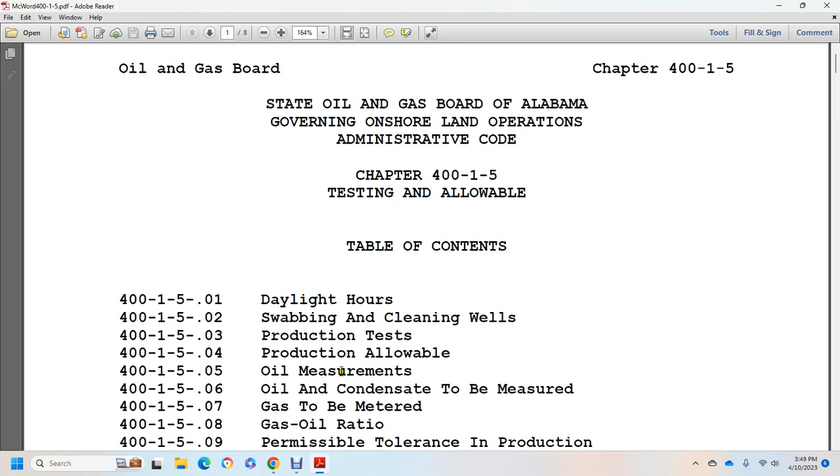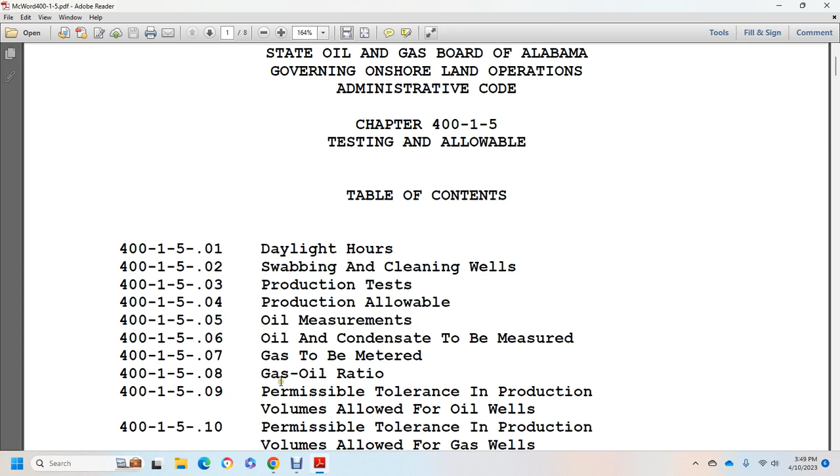Testing and Allowable, Table of Contents: 400-1-5-.01 Daylight Hours; .02 Swabbing and Cleaning Wells; .03 Production Test; .04 Production Allowable for Oil; .05 Oil Measurement; .06 Oil and Condensate Measurement; .07 Gas to be Metered; .08 Gas-Oil Ratio; .09 Permissible Tolerance in Production Volumes Allowed for Oil Wells; .10 Permissible Tolerance in Production Volumes Allowed for Gas Wells; Daylight Hours.

All open hole drill stem tests shall be completed within daylight hours; before sunset and shall not be considered as a production test. Copies of the drill stem test results shall be submitted to the board.

Rule 400-1-4-.03(2). For purposes of this rule: the word 'completed' shall mean with the closing of the drill stem test tool valve. No well shall be swabbed into production except during daylight hours and before sunset.

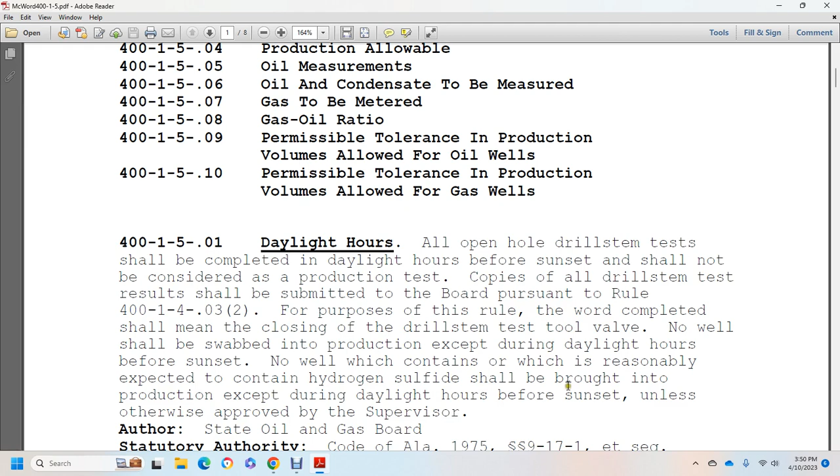No well which contains, or is reasonably expected to contain, hydrogen sulfide shall be brought into production except during daylight hours before sunset, unless otherwise approved by a supervisor.

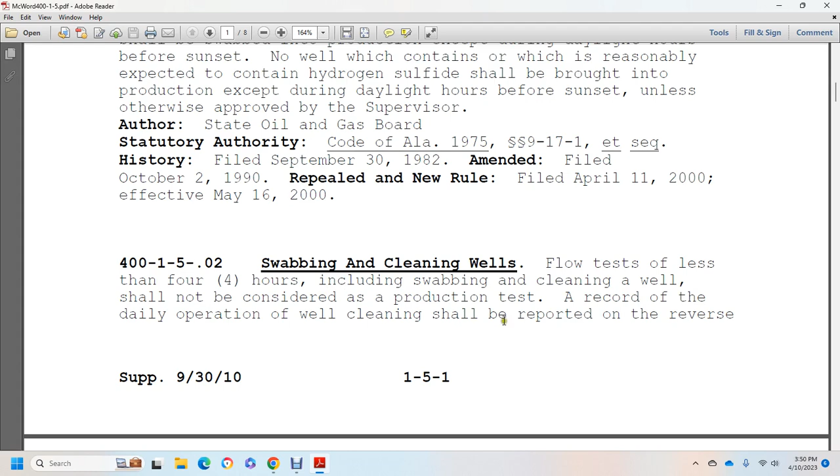400-1-5-.02 Swabbing and Cleaning Wells: flow test as well. Flow test less than 4 hours, including swabbing and cleaning of the well, shall not be considered for the production test. A record of the daily operation of well cleaning shall be reported on the reverse side of Form OGB-9.

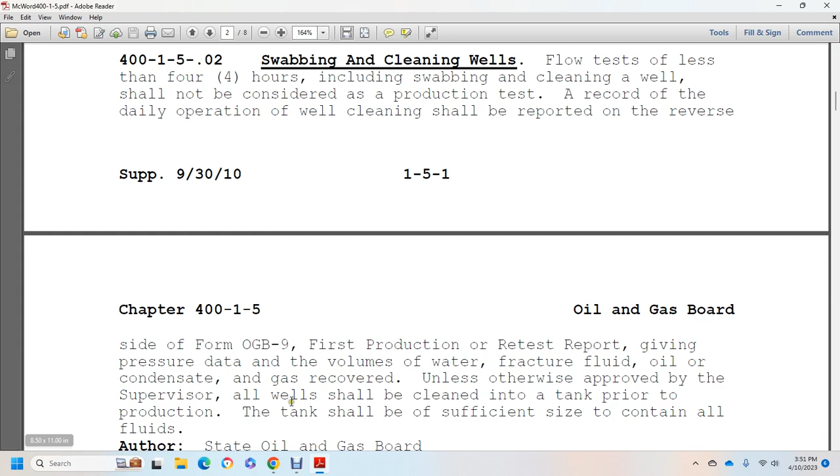The First Production or Retest Report shall give pressure data, volume, water, fracture fluid, oil, condensate, and gas recovered, unless otherwise approved by the supervisor. All wells shall be cleaned into a tank prior to production, and the tank shall be of sufficient size to contain all the fluids.

400-1-5-.03 Production Tests: all production tests shall be made only after approval of the supervisor. Operators completing a new well or recompleting an old well shall test the well to determine the applicable well's capability of producing the amount it can produce, including any allowable if assigned.

Such tests shall be at a stabilized rate for a minimum of 4 hours. Duration shall not exceed 72 hours, and shall be taken in a manner prescribed by the board rules and regulations.

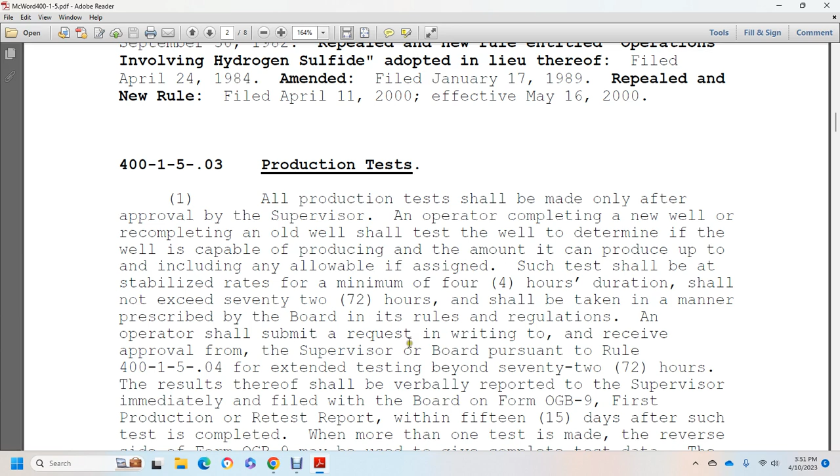Any operator shall submit a written request to receive approval from the supervisor or board, pursuant to Rule 400-1-5-.04, for extended tests beyond 72 hours.

The result thereof shall be verbally reported to the supervisor immediately and filed with the board on Form OGB-9 as the First Production or Retest Report, within 15 days after the test is completed.

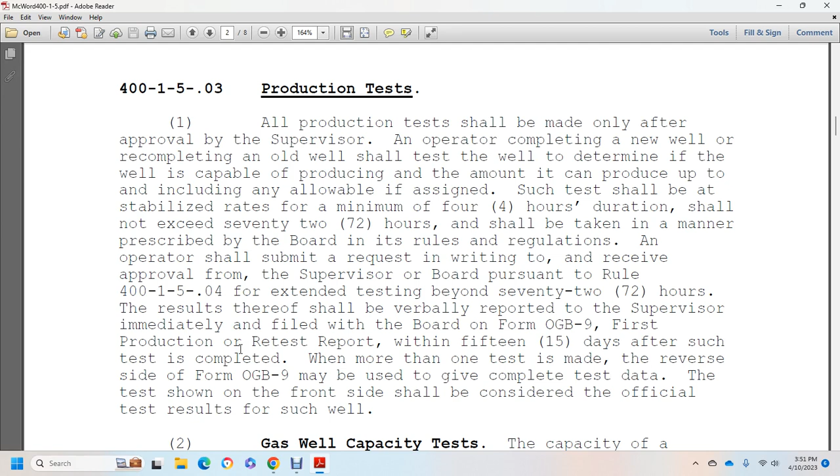If more than one test is made, the reverse side of Form OGB-9 may be used to give the complete test data. The test shown on the front side shall be considered the official test result for such well.

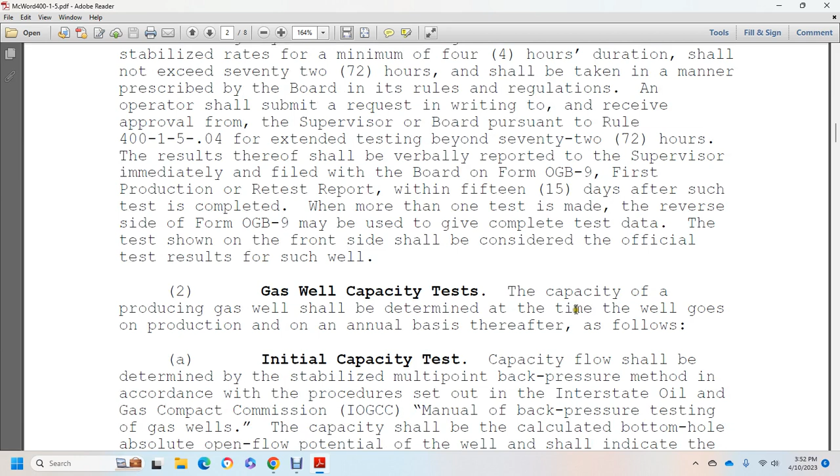2. Gas well capacity. The capacity of the producing gas well shall be determined at the time the well goes into production, on an annual basis thereafter, and the data filed.

Initial capacity test: capacity flow shall be determined by a stabilized multi-point back pressure method, in accordance with the procedure of the Interstate Oil and Gas Compact Commission.

Manual back pressure testing: gas wells. The capacity shall be calculated with the bottom hole absolute open flow potential. The well shall indicate its capacity to produce against zero pounds per square inch absolute pressure at the formation.

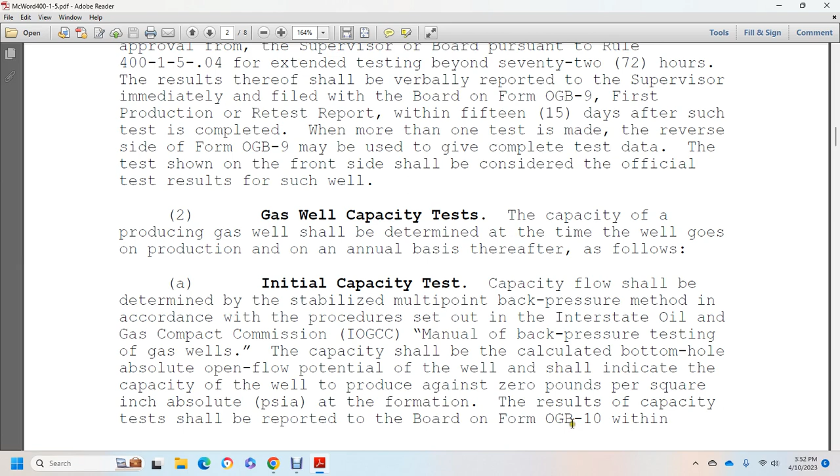The result of the capacity test shall be reported to the board on Form OGB-10 within 15 days after the test is completed. All field data with calculations and plot of the back pressure curve shall be submitted with this form.

Annual capacity test: the capacity test should be determined with a stabilized 1-point back pressure method per the procedure set forth in the Interstate Oil and Gas Compact Commission manual for back pressure testing of gas wells, using the most recently determined exponent N, which should be established by a stabilized multi-point back pressure test, with a stabilized 1-point test determining the absolute open flow.

The result of the capacity test shall be reported to the board within 15 days of completion on Form OGB-10A, with the field data, calculations, and plot of the back pressure curve submitted with this form.

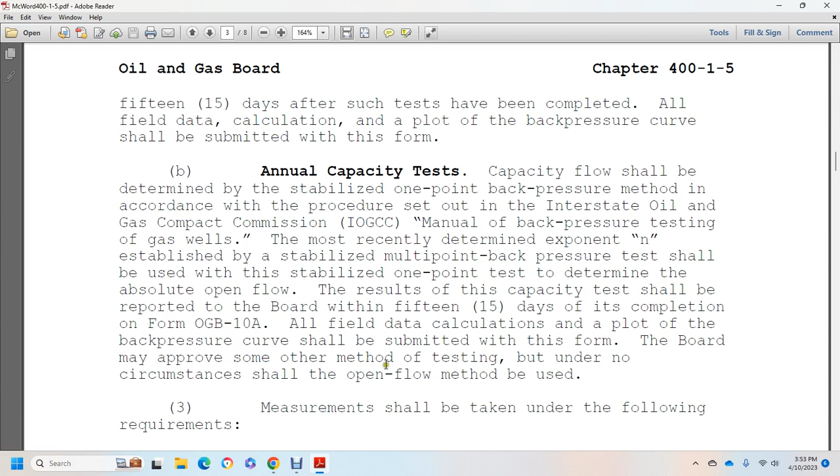The board may approve some other method of testing, but under no circumstance shall the open flow method be used. Measurements should be taken under the following requirements.

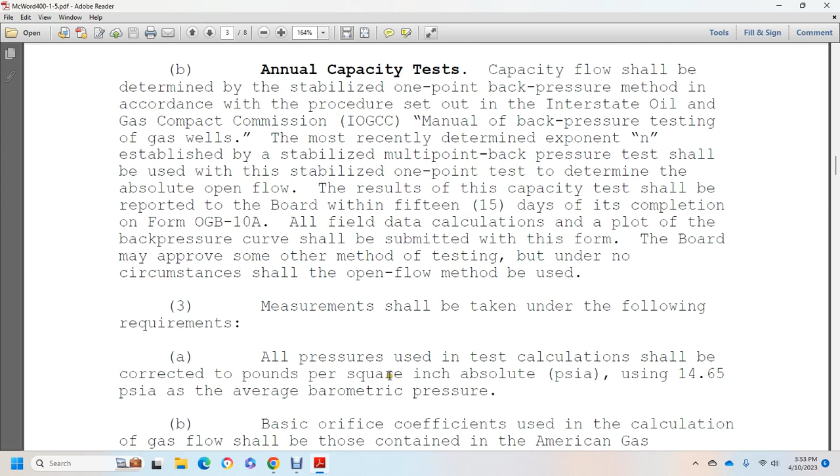All pressures used in test calculations should be corrected to pounds per square inch absolute, using 14.65 psi absolute as the average barometric pressure.

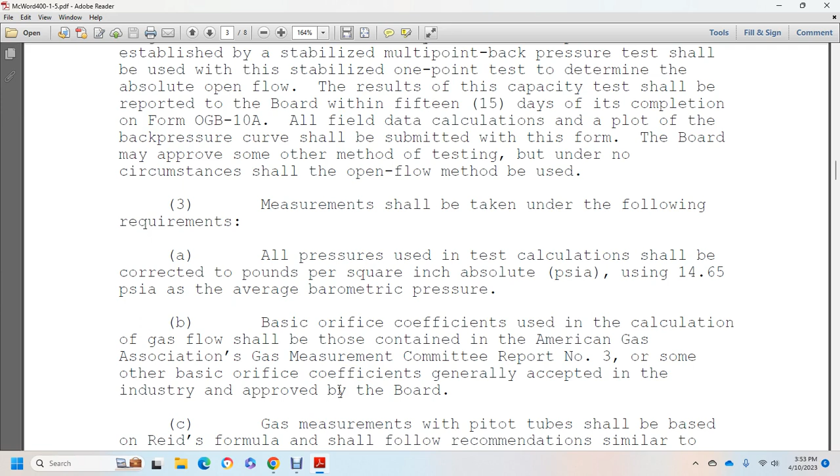Basic orifice coefficients are calculated using the gas flow formulas contained in the American Gas Association Gas Measurement Committee Report Number 3, or some other basic orifice coefficients generally accepted in the industry and approved by the board.

Gas measurement using pitot tubes shall be based on the Reid's formula and shall follow recommendations similar to those set forth in Appendix 4 of the U.S. Bureau of Mines monograph.

Correction for base pressure and base temperature shall be made to orifice measurements.

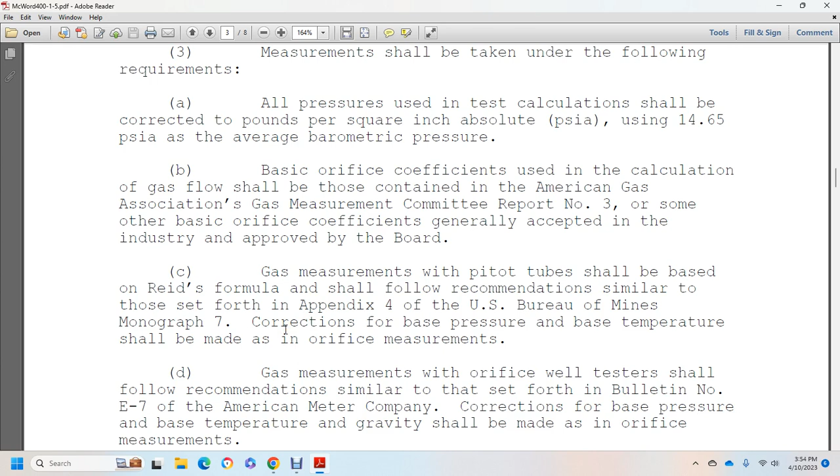General gas measurements using orifice well testers shall follow recommendations similar to those set forth in Bulletin E7 of the American Meter Company.

Correction for base pressure, base temperature, and gravity shall be made to orifice measurements.

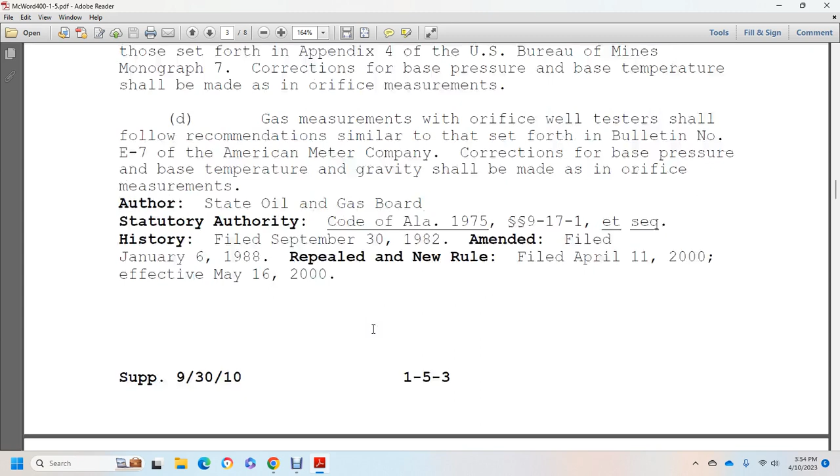Section 400-1-5-.04 covers the production allowable to be used until special field rules are adopted. The operator shall submit a request in writing to receive approval from the supervisor for extended testing with the end of the temporary test allowable.

Requests should be submitted on form OGB 9, First Production Retest Report, or OGB 12, Operator's Certificate of Compliance, authorizing transport of oil, gas, or condensate from a well. Variations of the temporary test allowable shall be specified by the supervisor.

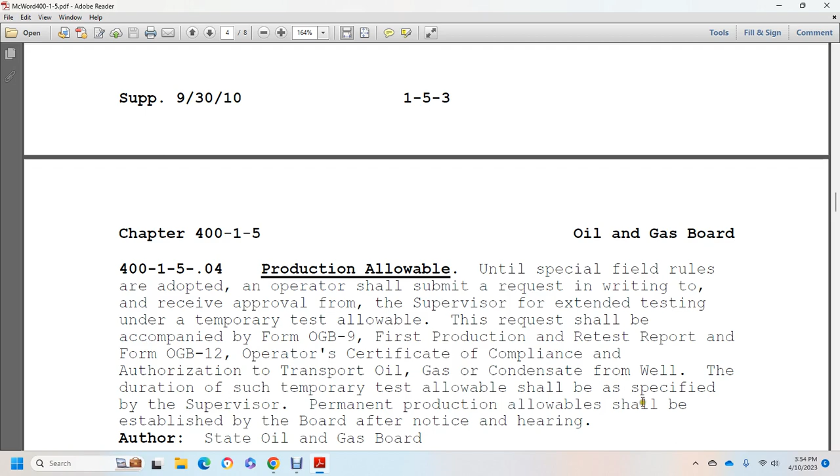A permanent production allowable shall be established by the board after notice and hearing.

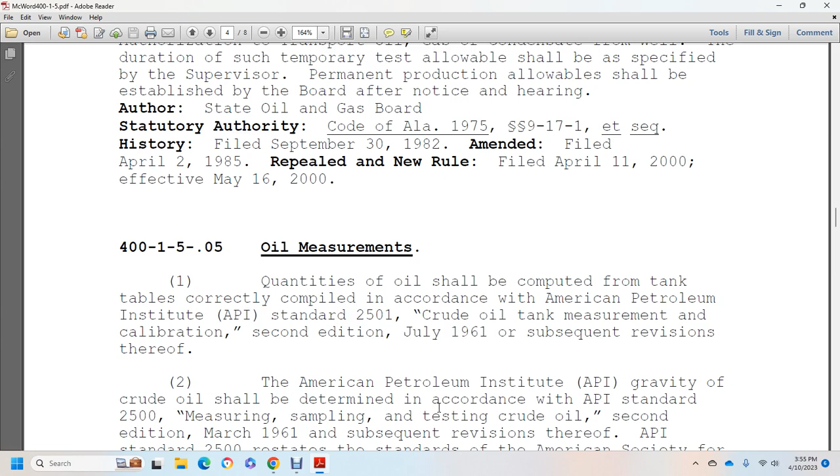Section 400-1-5-.05 covers oil measurement. Quantities of oil should be computed using tank tables in accordance with American Petroleum Institute Standard 2501, Crude Oil Tank Measurement and Calibration, Second Edition, July 1961, and subsequent revisions thereof.

The American Petroleum Institute gravity of the crude oil shall be determined in accordance with API Standard 2500, Measuring, Sampling, and Testing Crude Oil, Second Edition, March 1961, and subsequent revisions thereof. API Standard 2500 restates the standard of the American Society for Testing and Materials, ASTM designation.

ASTM designation D287-39, Standard Method of Test for the Gravity of Petroleum Products by means of a hydrometer. Observed gravity, if the observed temperature is corrected, gives API gravity at 60 degrees Fahrenheit.

Using the tables from the American Society for Testing Materials and the Institute of Petroleum, the ASTM-IP Petroleum Measurement Tables, ASTM designation number 1250, IP designation 200.

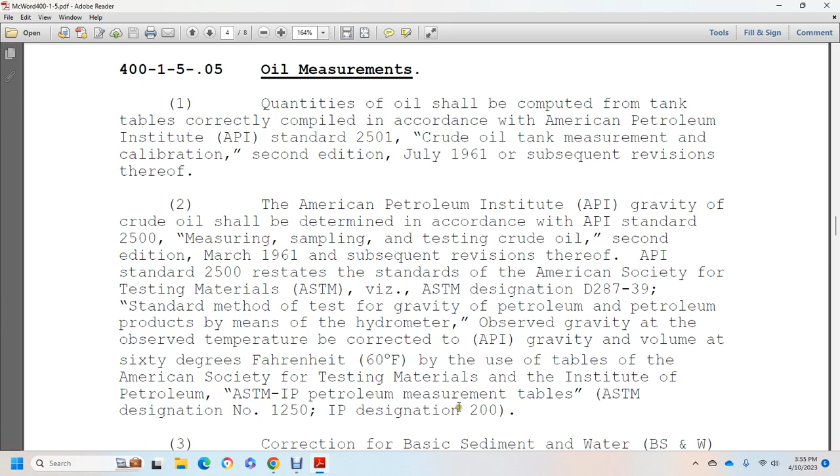Correction for basic sediment and water shall be made in accordance with the method specified in the joint ASTM-API method for testing sediment and water of crude oil, ASTM designation D96-63, API Standard 2542.

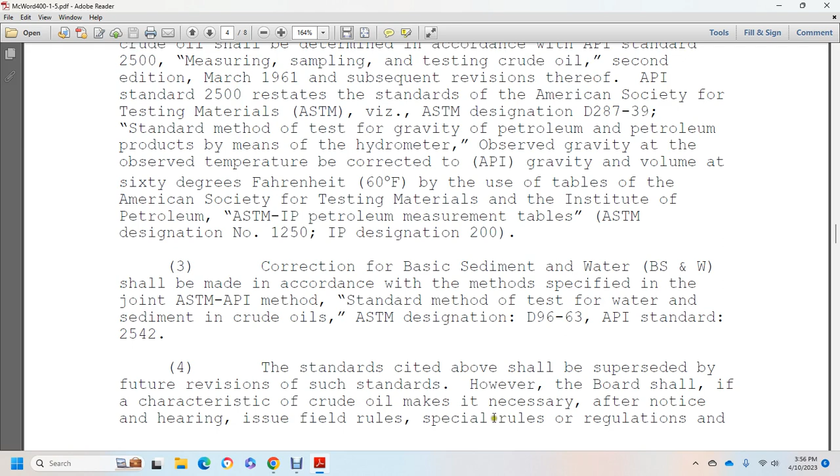The standards cited above shall be superseded by future revisions of such standards. However, the board shall, if the characteristics of the crude oil make it necessary, after notice and hearing, issue field rules, special rules, or regulations and orders prescribing a specified method of measuring, sampling, and testing crude oil.

Section 400-1-5-.06 covers oil and condensate to be measured. All oil produced should be accurately measured and reported to the board by the operator on form OGB 14, Operator's Monthly Report from Oil Wells.

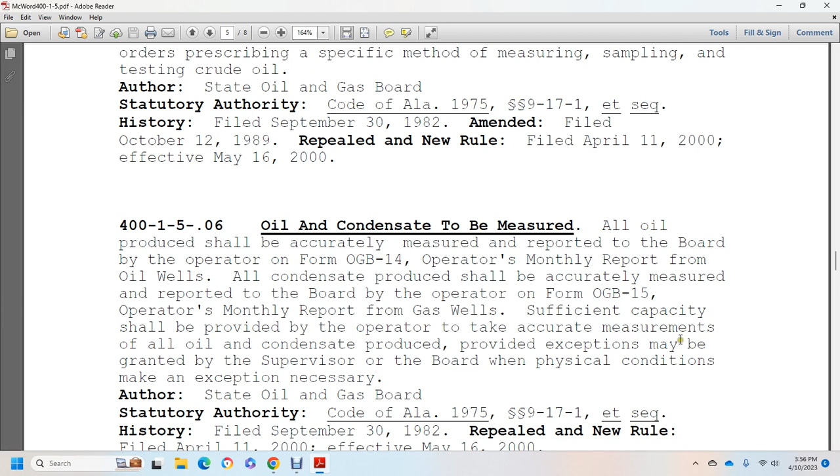All condensate produced shall be accurately measured and reported to the board by the operator on form OGB 15, Operator's Monthly Report for Gas Wells. Sufficient capacity shall be provided by the operator to accurately measure all oil and condensate produced, provided that exemptions may be granted by the supervisor or board where physical conditions make exemptions necessary.

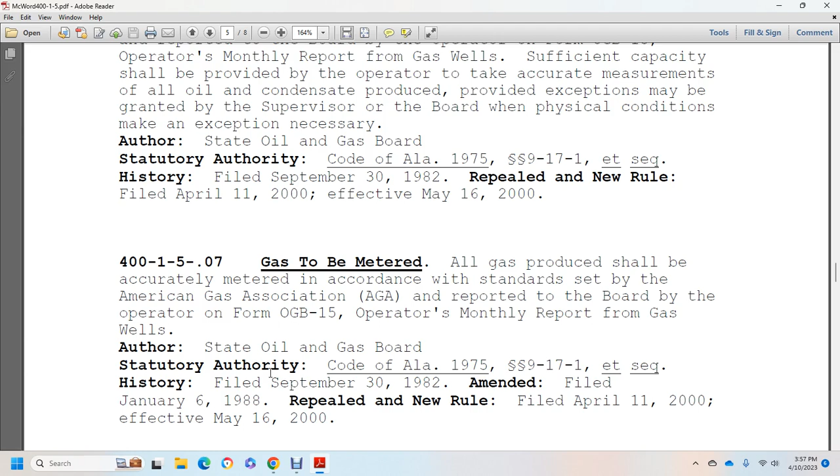Section 400-1-5-.07 covers gas metering. All gas shall be accurately measured in accordance with standards set forth by the American Gas Association and reported to the board by the operator on form OGB 15, Operator's Monthly Report for Gas Wells.

Section 400-1-5-.08 covers gas-oil ratio. Any well producing with a gas-oil ratio exceeding 2,000 cubic feet of gas per barrel of oil produced shall be allowed to produce daily only the volume of gas obtained by multiplying the daily oil allowable by 2,000 cubic feet.

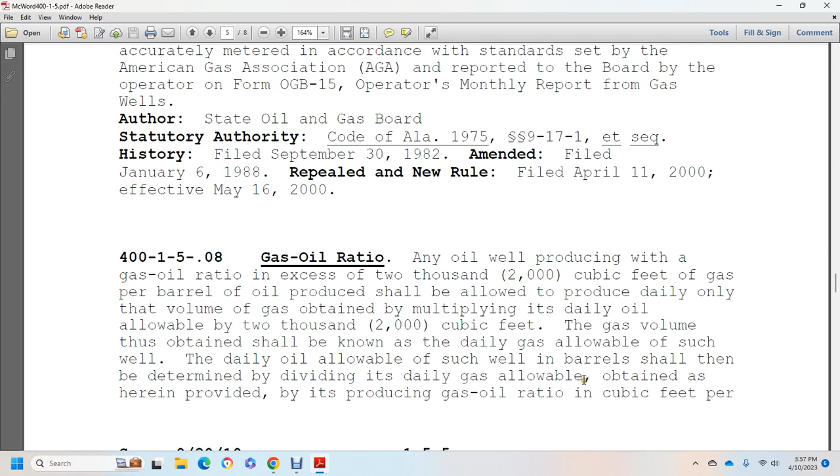The gas volume obtained shall be known as the daily gas allowable for such well. The daily oil allowable for such well, in barrels, shall then be determined by dividing the daily gas allowable obtained as herein provided by the producing gas-oil ratio in cubic feet per barrel of oil produced.

All wells producing gas cap of an oil reservoir, in which the oil well or wells are completed and producing, shall, to the extent that can be produced without waste, be allowed to produce daily only the volume of gas with hydrocarbons, under the conditions of pressure and temperature of the existing reservoir from which it produces.

This shall be equivalent in volume, under like pressure and temperature, to the oil and gas that would be produced daily by the oil well in the same reservoir producing the highest daily oil allowable, if its gas-oil ratio were 2,000 cubic feet of gas per barrel of oil.

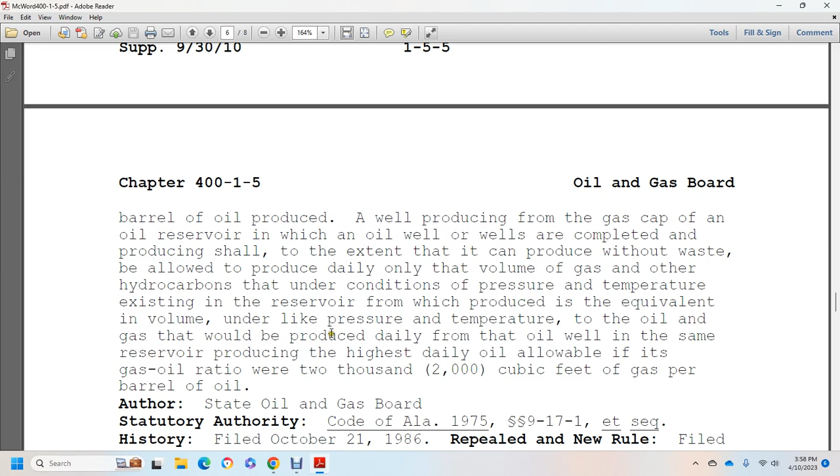Section 400-1-5-.09: permissible tolerance production volumes allowed for oil wells.

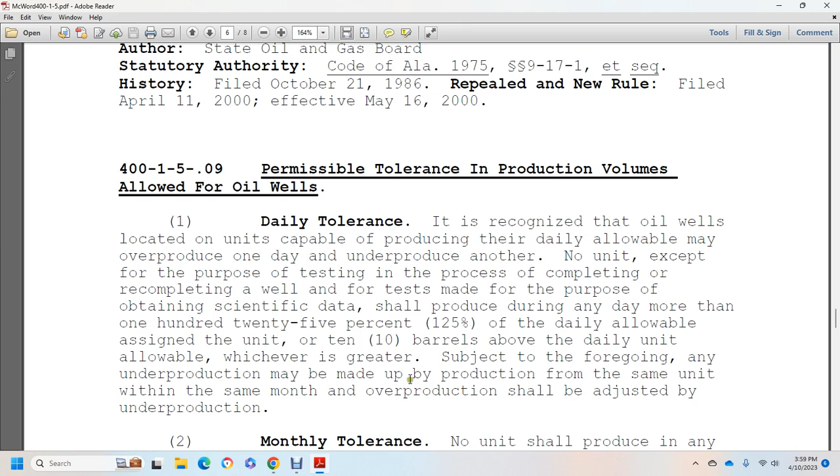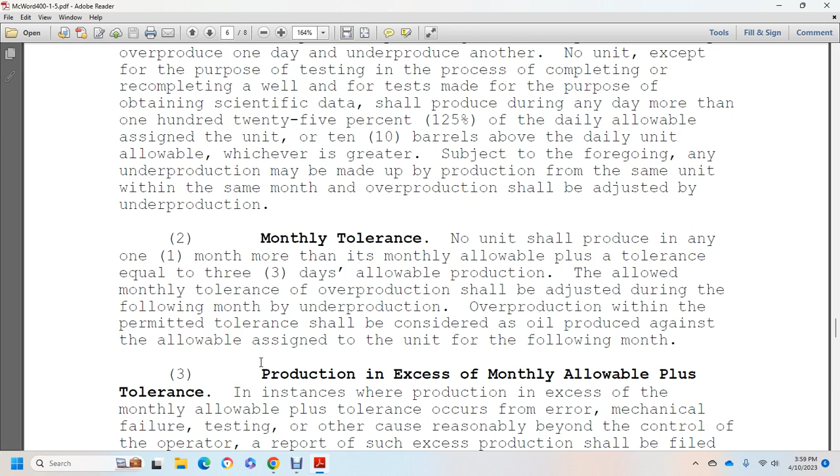The overproduction should be adjusted with underproduction. Monthly tolerance: no unit shall produce in one month more than the monthly allowable plus a tolerance equal to three days allowable production. The allowed monthly tolerance of overproduction should be adjusted against the following month's underproduction. Overproduction within the permitted tolerance shall be considered oil produced against the allowable assigned to the unit for the following month.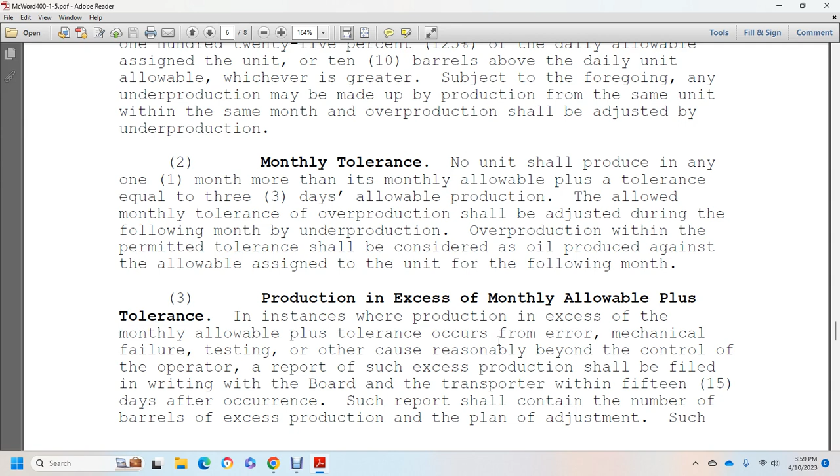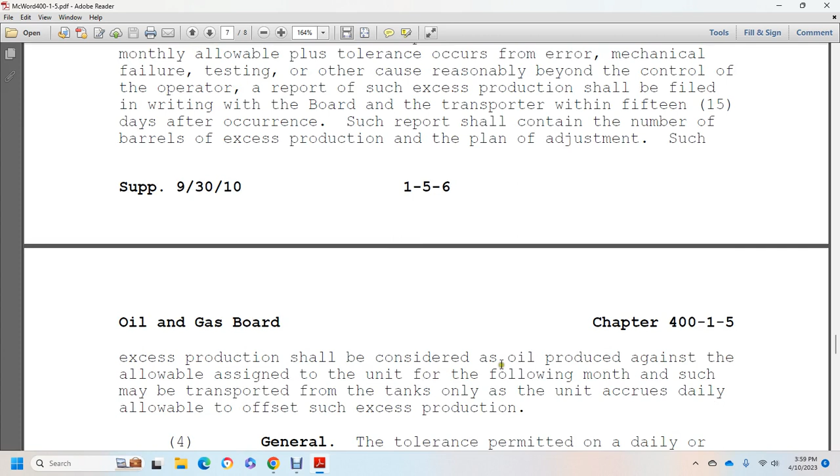Production excessive of the monthly allowable plus tolerance: if production excessive of the monthly allowable plus tolerance occurs due to error, mechanical failure, testing, or other cause reasonably beyond the control of the operator, a report of such production shall be filed in writing with the board and the transporter within 15 days of the occurrence. Such report shall contain the number of barrels in excess of the production plan, with adjustments. Such excess production shall be considered oil produced against the allowable assigned to the unit for the following month, and such excess may be transported from the tanks at the unit's accrued daily allowable to offset such excess production.

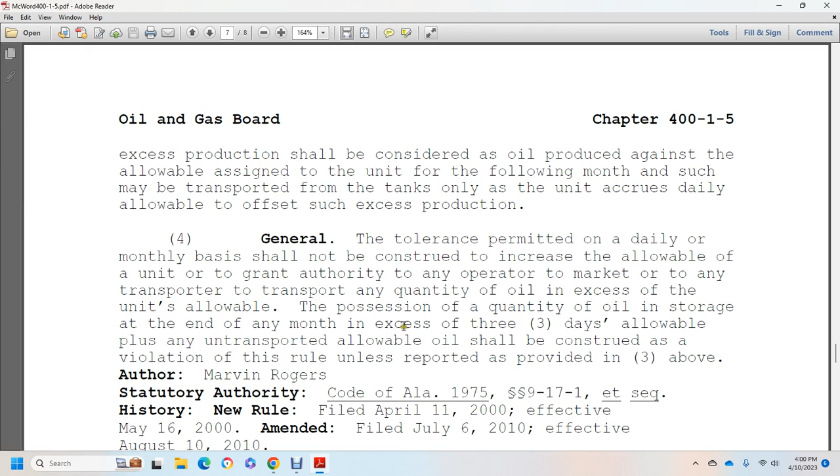General: the tolerance permitted on a daily or monthly basis shall not be construed as an increase of the allowable for the unit, nor as granting authority for the operator to market or transport any quantity of oil in excess of the unit's allowable production or the unit's allowable disposition quantity. If in any month production in excess of three days allowable plus the untransported allowable oil occurs, it shall be construed as a violation of the rules unless reported as provided above.

Section 400-1-5-.10: permissible tolerance production volumes allowed for gas wells.

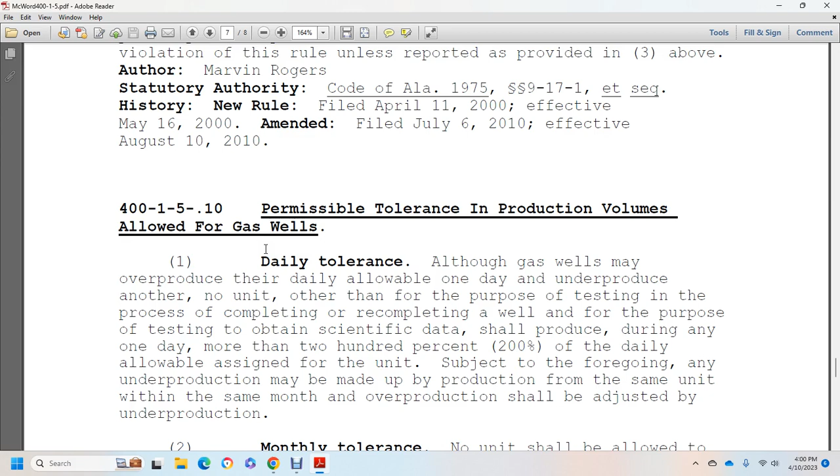Daily tolerance: although gas wells may overproduce the daily allowable one day and underproduce another. No unit, other than for the purpose of testing, completing, recompleting a well, or obtaining scientific data, shall produce during any one day more than 200% of the daily allowable assigned to the unit. Subject to the foregoing, any underproduction may be made up by production of the same unit within the same month, and overproduction shall be adjusted by underproduction.

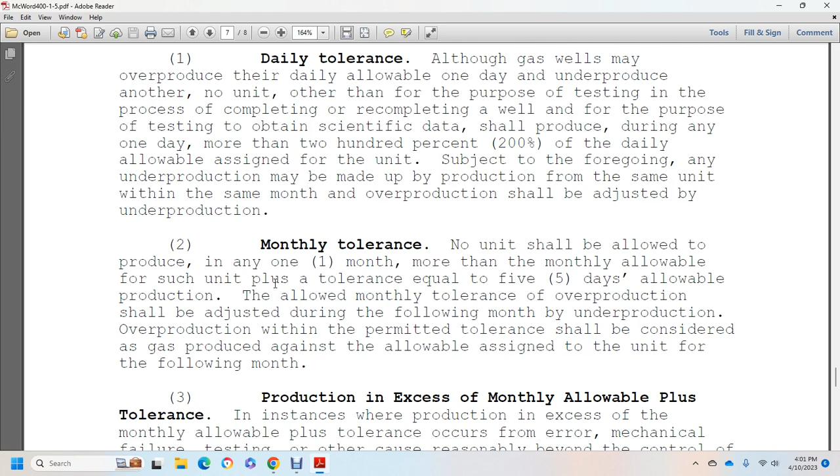Monthly tolerance: no unit shall produce in one month more than the monthly allowable for such unit plus a tolerance equal to five days allowable production. Overproduction during the monthly tolerance period shall be adjusted during the following month by underproduction. Overproduction within the permitted tolerance shall be considered gas produced against the allowable assigned to the unit for the following month.

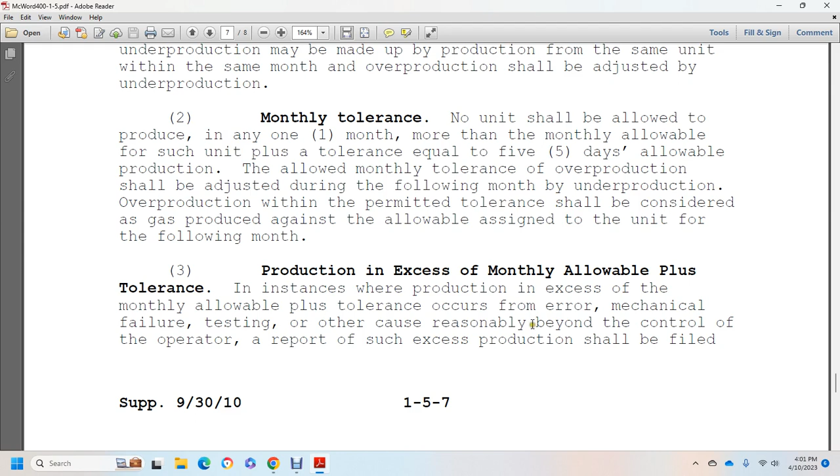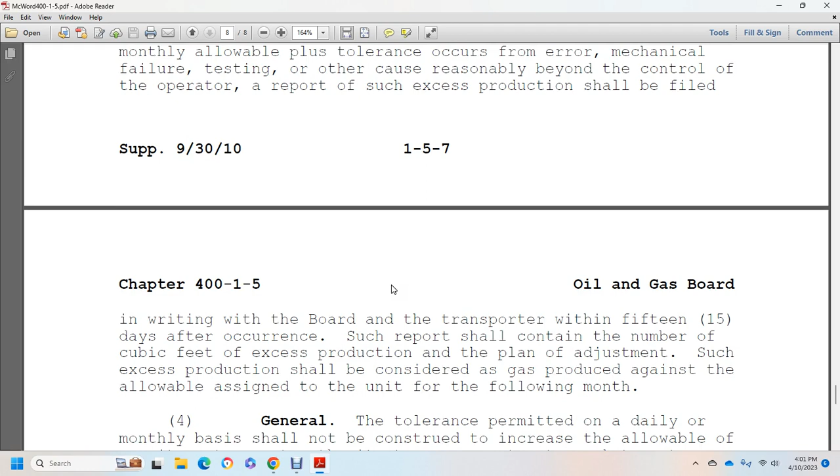Production excessive of the monthly allowable plus tolerance: if production excessive of the monthly allowable plus tolerance occurs due to error, mechanical failure, testing, or other cause reasonably beyond the control of the operator, a report of such excess production shall be filed in writing with the board and the transporter within 15 days of the occurrence. Such report shall contain the number of cubic feet in excess of the production plan, with adjustments. Such excess production shall be considered gas produced against the allowable assigned to the unit for the following month.

General: the tolerance permitted on a daily or monthly basis shall not be construed as an increase of the allowable for the unit, nor as granting authority for the operator to market or transport any quantity of gas in excess of the unit's allowable.

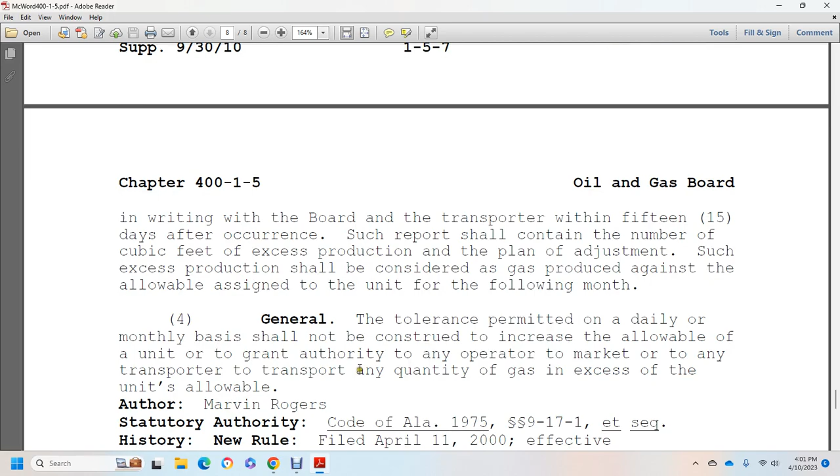That was testing and allowable.